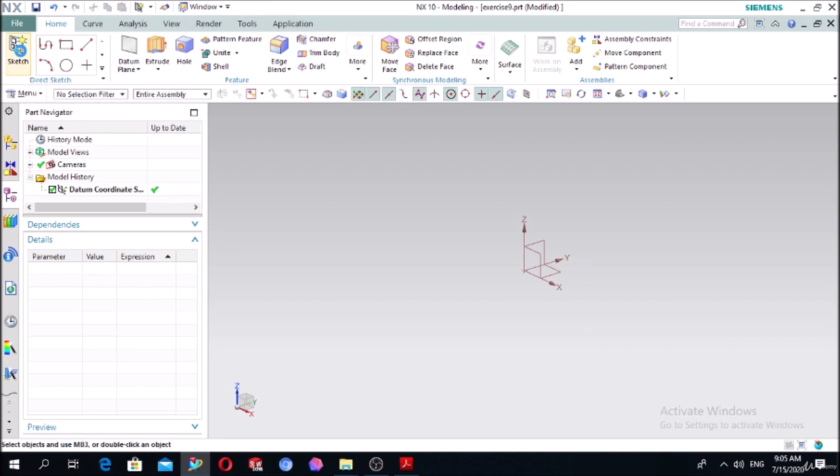Let's open the NX, press the sketch, select the plane and press OK. So let's firstly draw the circle on the center of the axis and put the dimension as 50 millimeter, and draw one more circle. It will be a reference circle with the diameter of 70 millimeter.

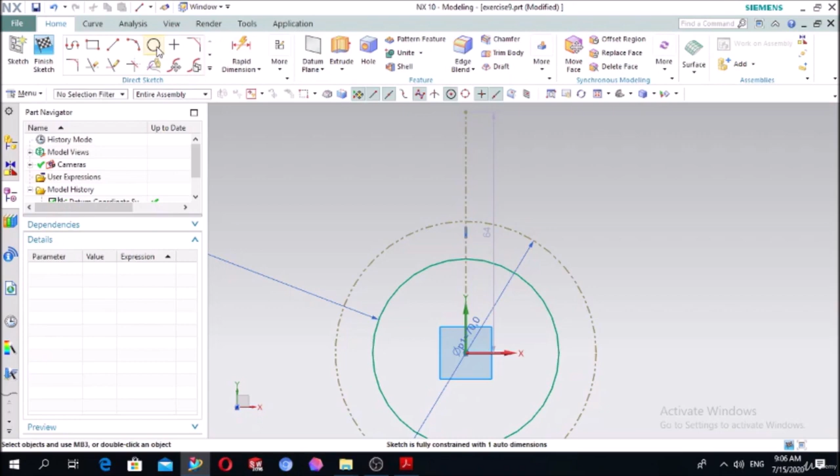So convert this second circle into a reference circle, so it is converted to the reference circle, and draw one line here, a vertical line. It will also be a reference line, and draw two circles. One, okay, and the diameter of the circle is 20 millimeter.

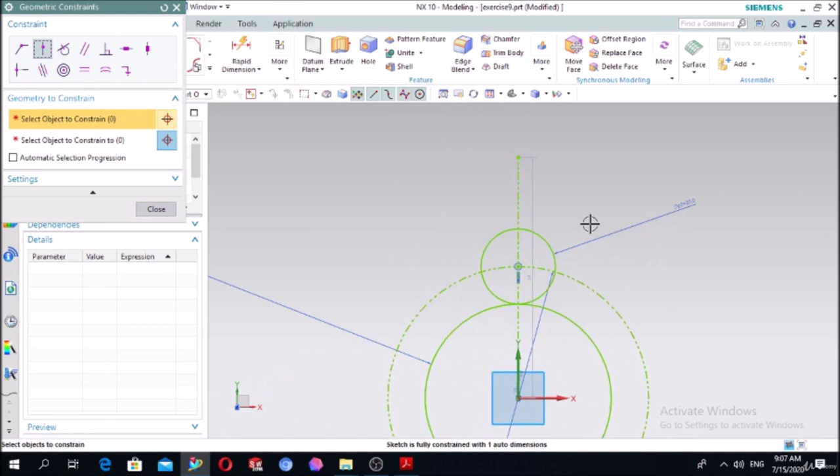Using the geometric constraint and point on the curve function, select the center and this vertical line, the same center of the circle and this circle, and draw a line here, this one and this line. The same here.

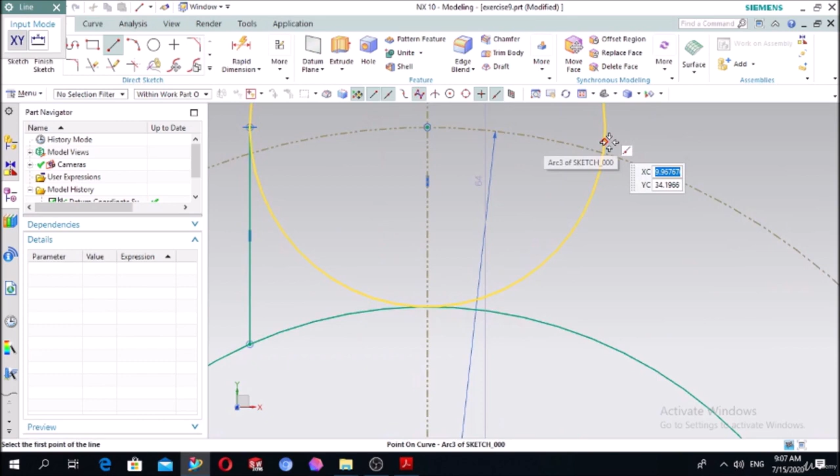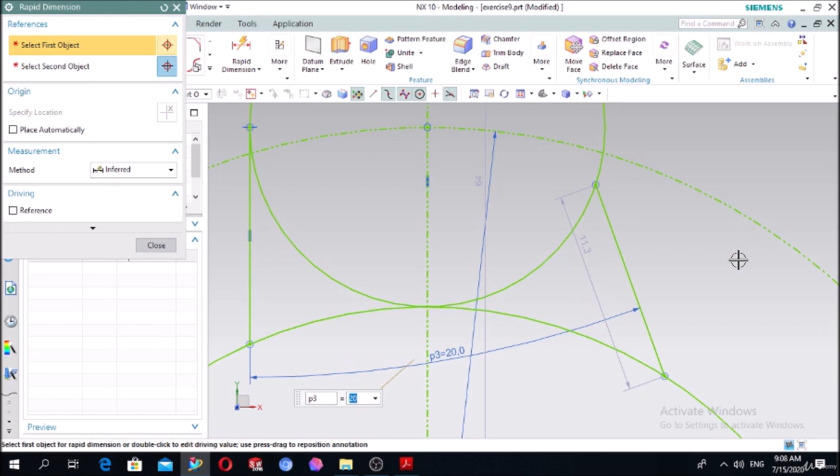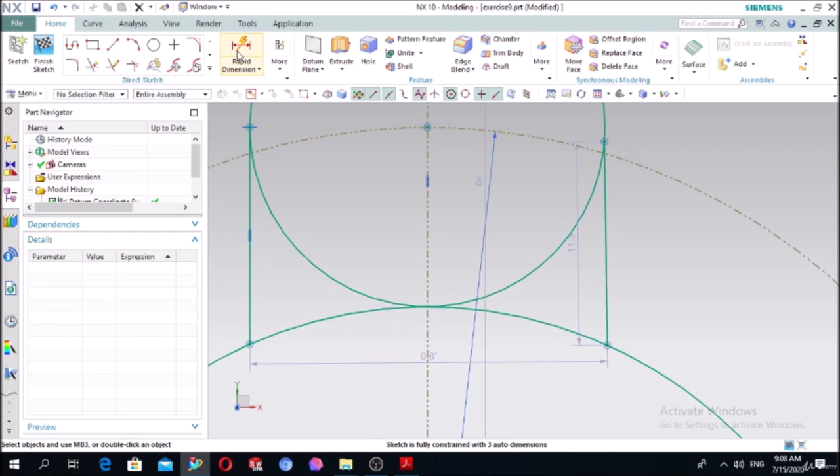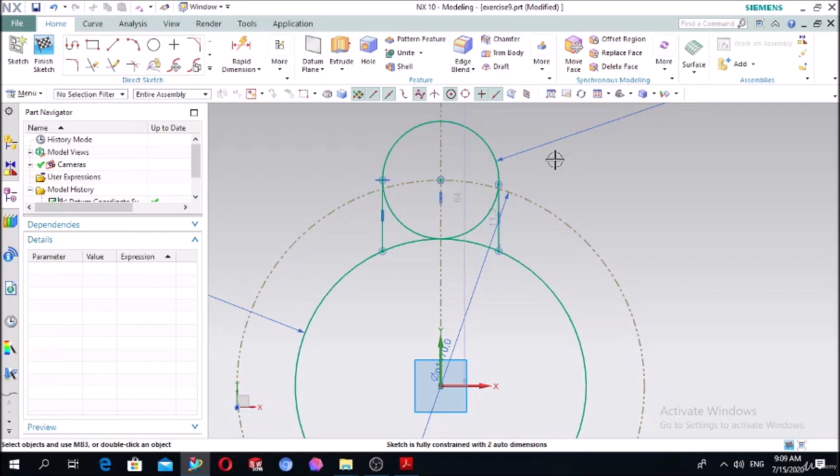And make the distance of these lines 20 millimeter. And make this line and this circle tangent. There is something wrong. Let's delete this one. The distance between this line and this line, okay. It's 20. Make it 20.

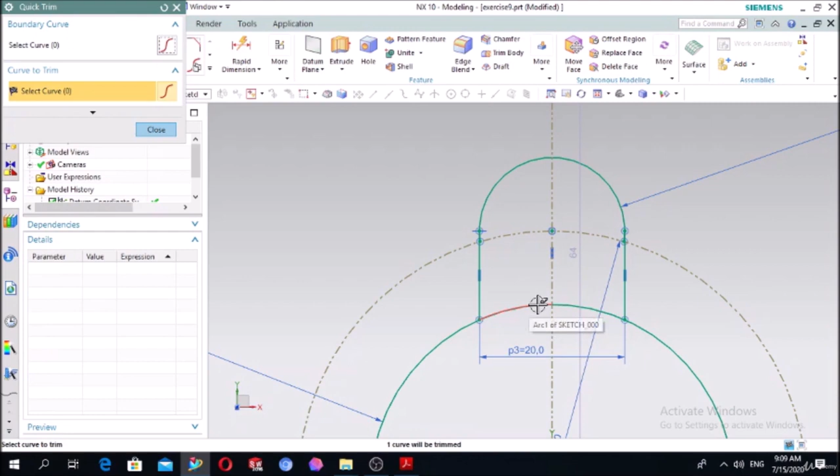And make a quick trim. This one, and these ones, and draw an additional small circle here, with the diameter of 10 millimeter.

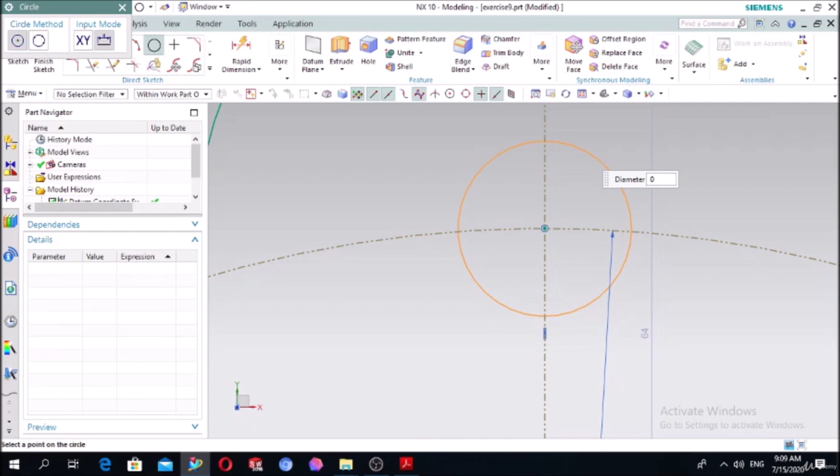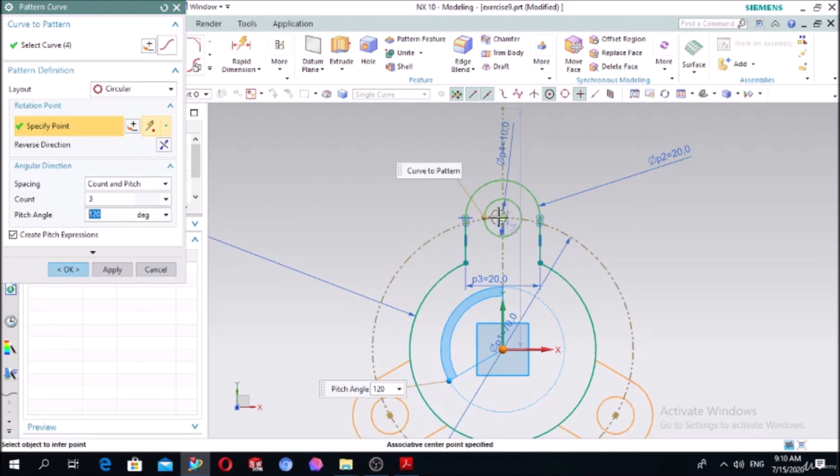Then using the pattern function, make a pattern of this curve, single curve, this one, this and this, in a circular layout. The center is this one, and the pitch is 120. Press OK and trim these unnecessary parts. Press close. Now we can make the extrusion using the extrude function.

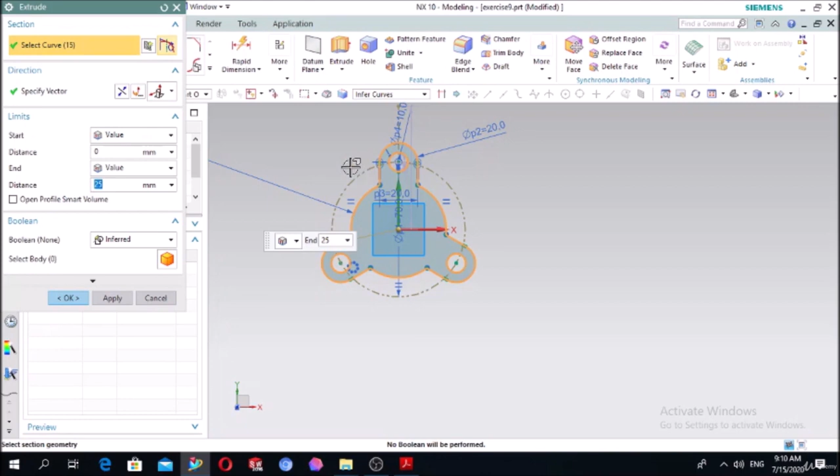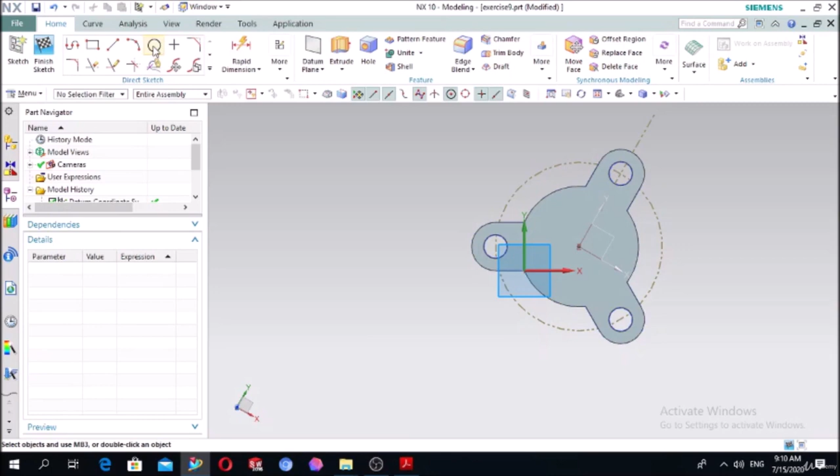Extrude is around 25 millimeter. Press OK. So the base is created. Now draw the next elements of the project. Select the sketch, select this face, press OK. Draw the circle in the middle with the diameter of 40 millimeter.

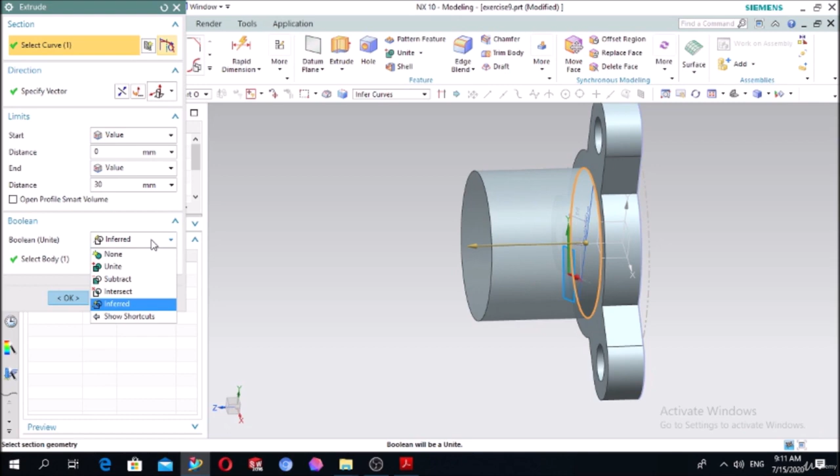And extrude it to a length of 30 millimeter. Here write 30 millimeter, and using the Boolean logic we can unite with the base. Press OK. Next is to draw on this face. Press OK. Draw the circle with the diameter of 30 millimeter.

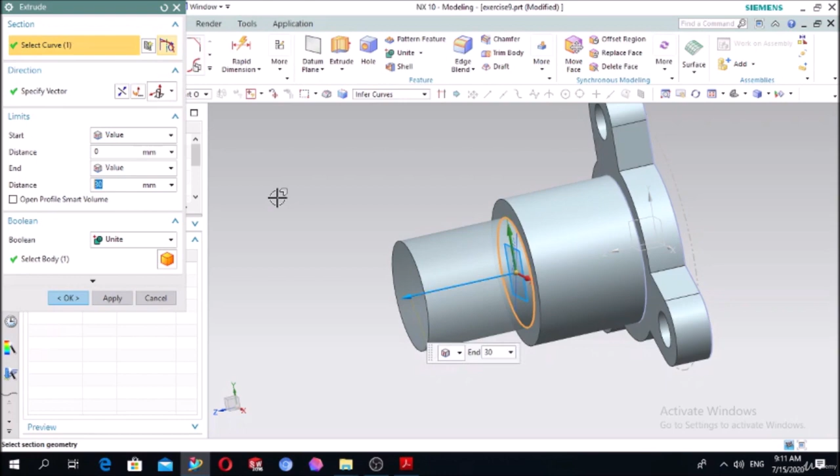Press OK. And using the extrude function, we will make the subtract, change the direction and the value to until selected, this face. It's not unite, in this case it will be subtract, so press OK.

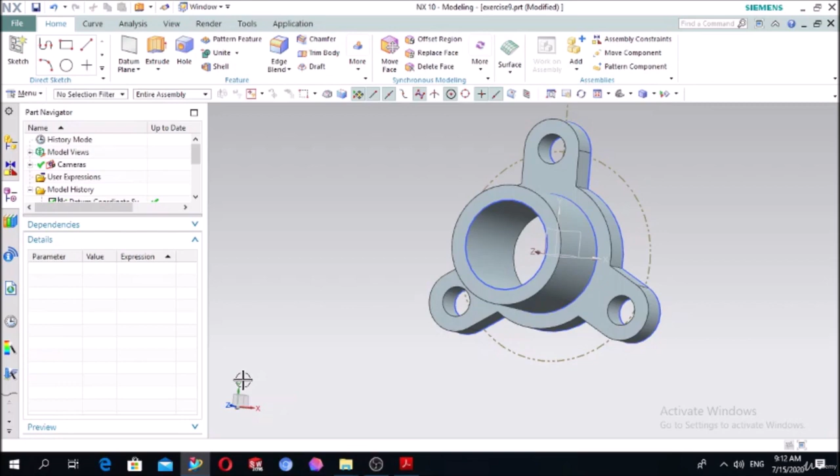Last step is to make the hole here, and it is at 120 degrees, so in this case we will need an additional reference datum plane. In order to make the reference datum plane, firstly make a sketch, select this face and press OK. So draw the line here and draw a line here, make the angle between this and this line.

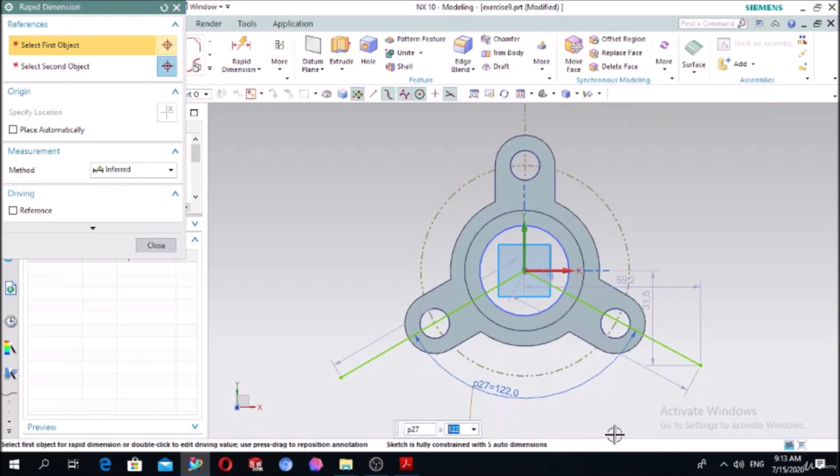Let's first delete this one and draw the line, and make the angle between this line and this line 120. No, just delete this one. Make the angle between this line 120, and convert these lines to reference, this line and this line.

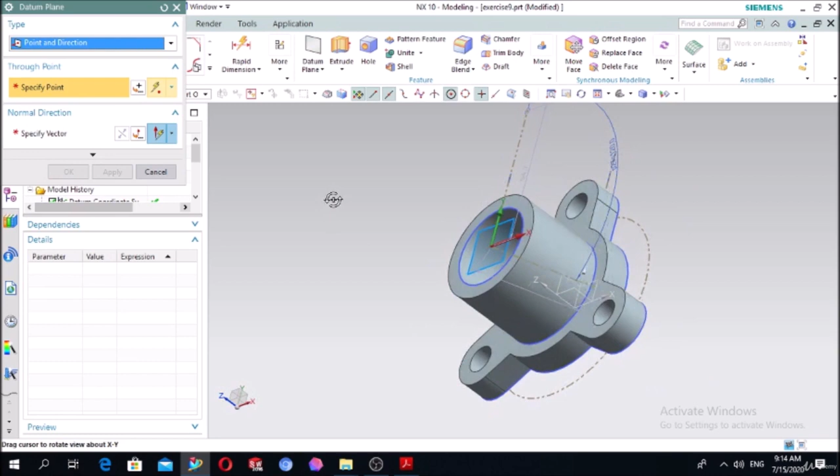And draw the datum plane here. Select the datum plane, select point and direction, select this point and press OK. So we made one additional datum plane here, and we will draw the circle on this datum plane.

Sketch, select, press OK. So draw the circle. The diameter is 5 millimeter. Distance between the center of the circle and this point is 15 millimeter.

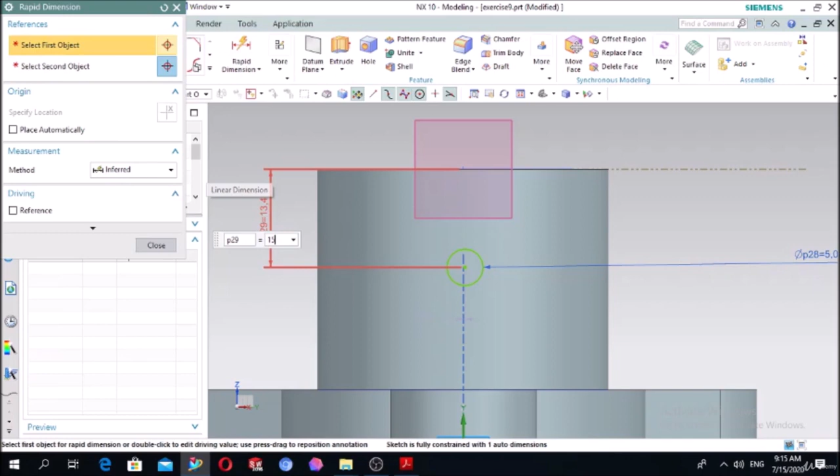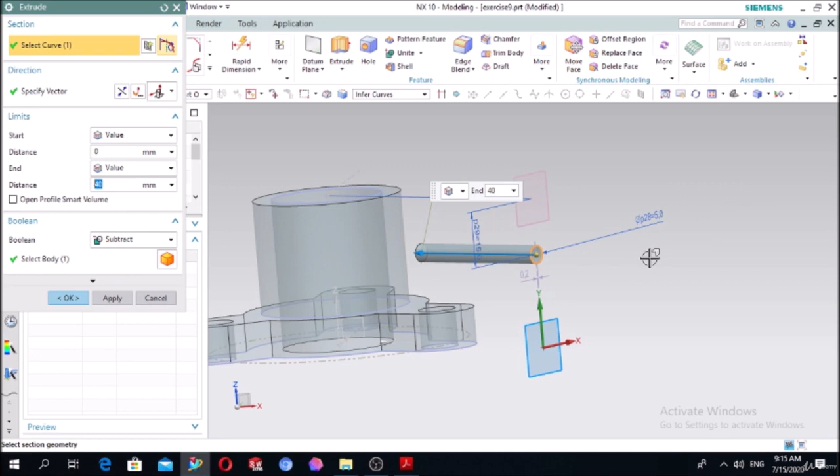The circle is created. Now we can extrude it, reverse direction, and make it subtract. Okay, the hole is obtained in the required position.

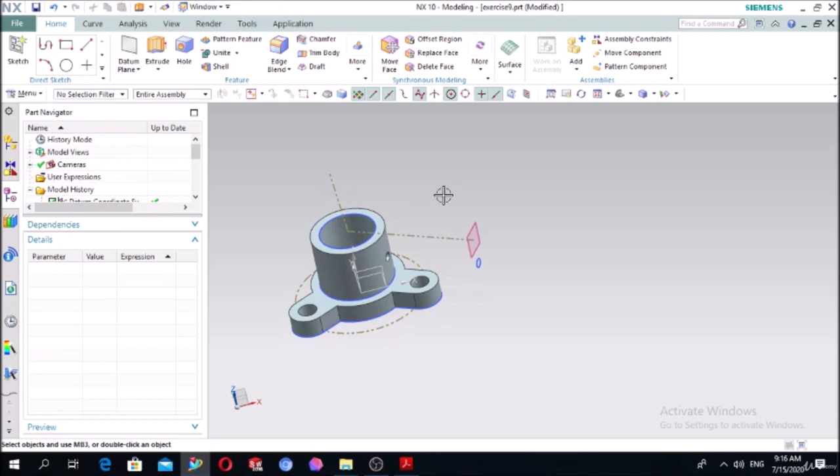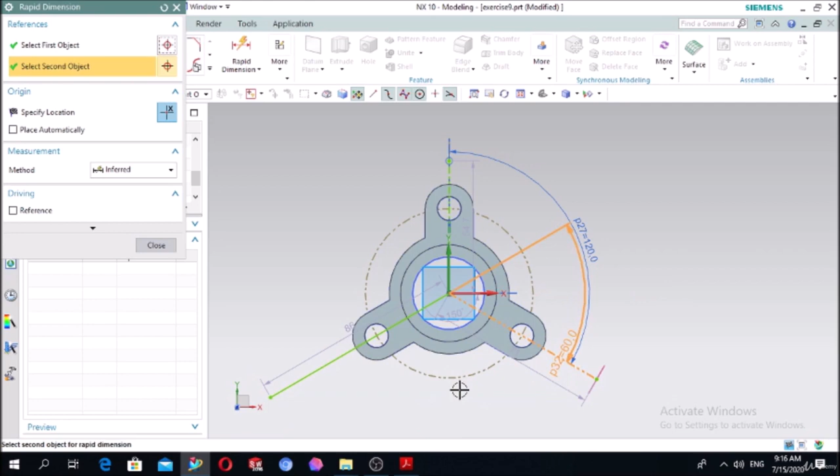So the same, we can make that on the plane here. Let's select this sketch and draw one more line here. Define the angle between this and this, 120, convert it to reference and finish. Select the datum plane, this point, and press OK.

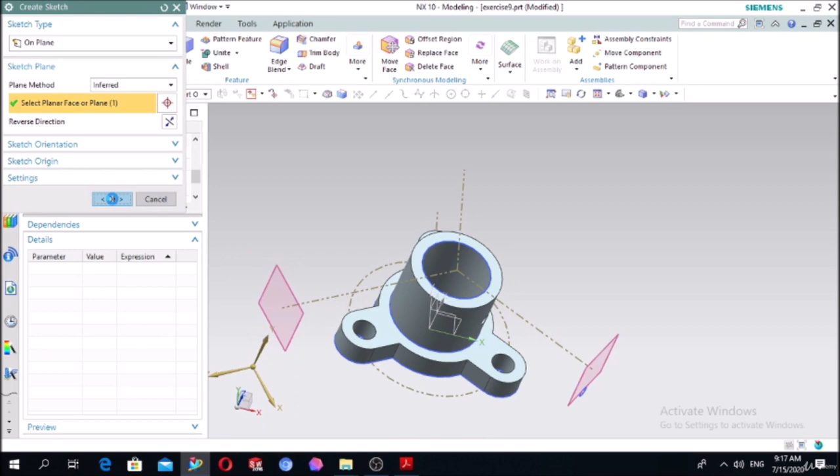Sketch, select this datum plane, sketch, this datum plane, OK. Five millimeter, press enter. And the distance between this center and this point is 5 millimeter.

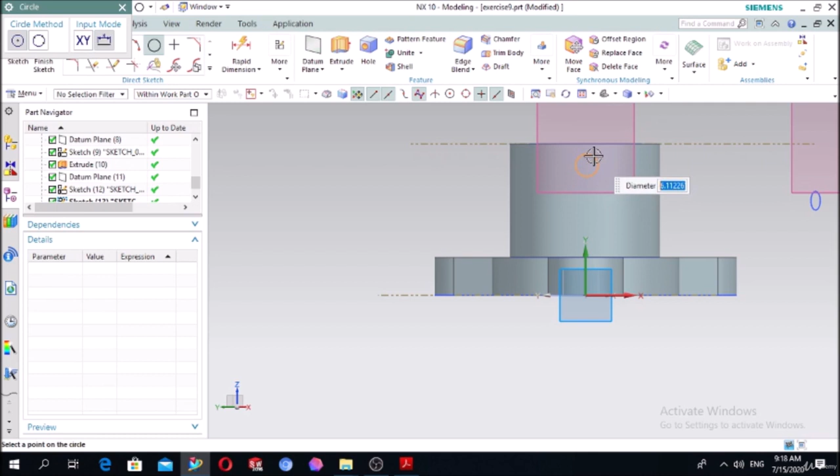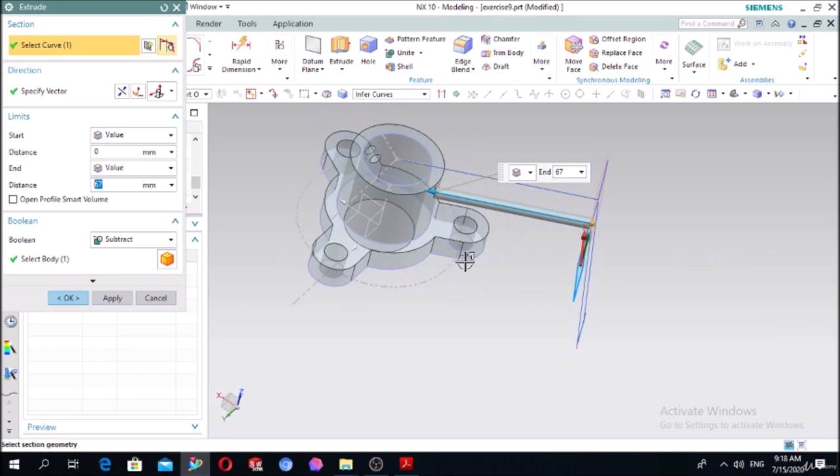And distance, and the distance from this point to this point is 15 millimeter. Extrude, reverse direction, subtract, and OK. See, 2 holes are obtained. This is the first exercise for today's lesson.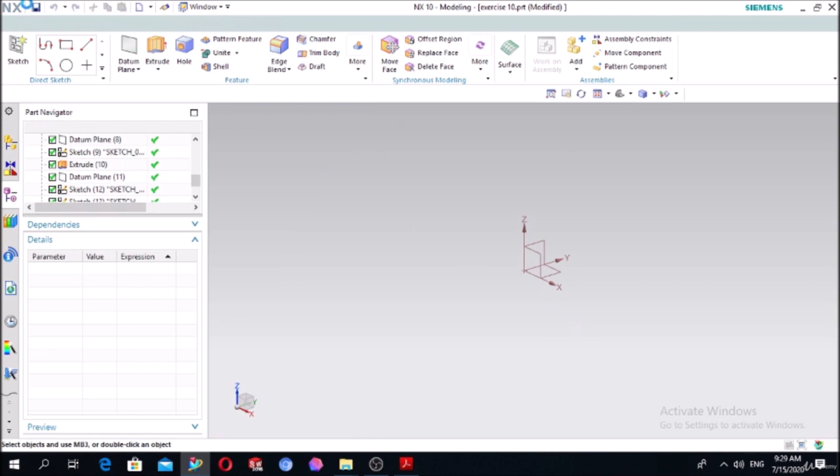Now we will see the second one, this exercise. Okay, let's continue with the second project. Open new file. Call it exercise 10. Press OK. Select the sketch, define the plane and press OK. The second exercise, this one, let's start to draw this project. Okay.

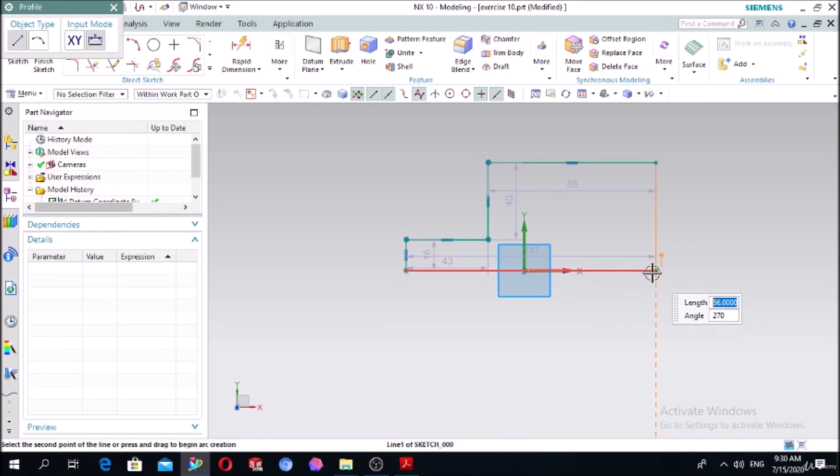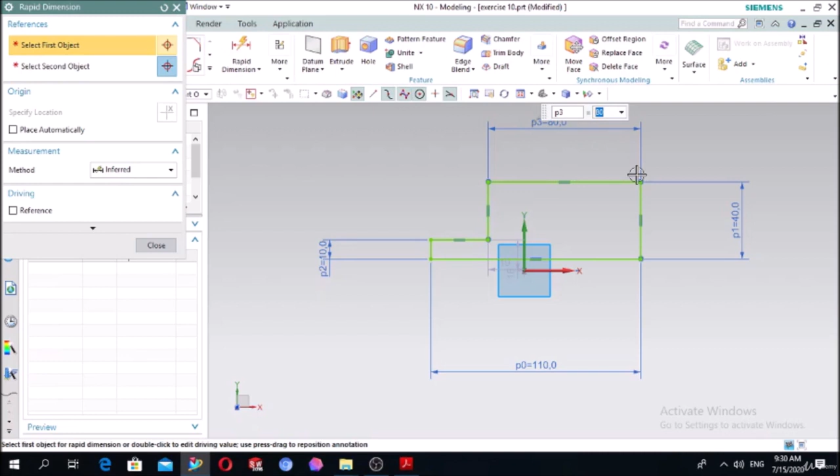Select the profile. Draw the line here, in this kind of shape. Define the dimensions. The height is 40 millimeter. Okay, first we can make this distance 10 and the height is 40 millimeter, and this distance is 80. And I think this distance is already defined.

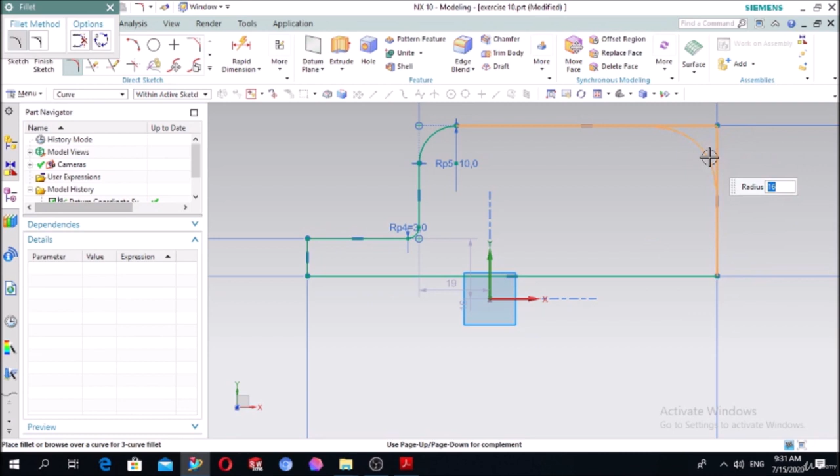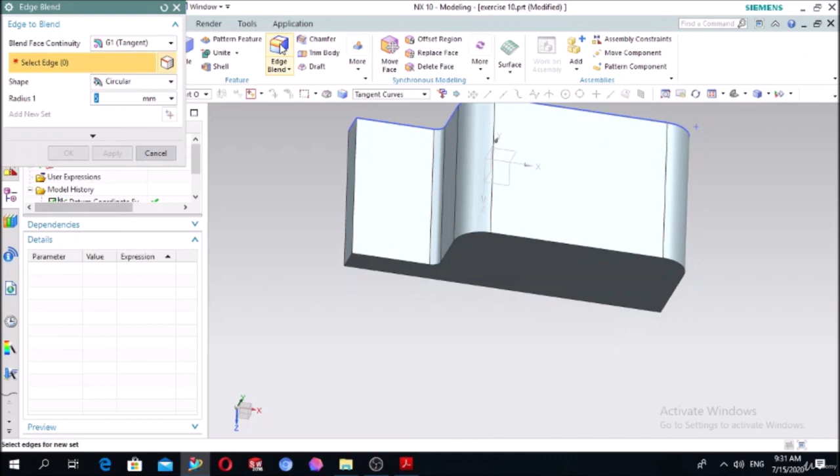Make the fillet on this part. The radius is 3 millimeter, and the same here, 10 millimeter, and here also 10 millimeter. This sketch is ready, we can make extruded. It is 50 millimeter. Press OK. We can make the edge blend. 10mm this one, and this one also. Press OK.

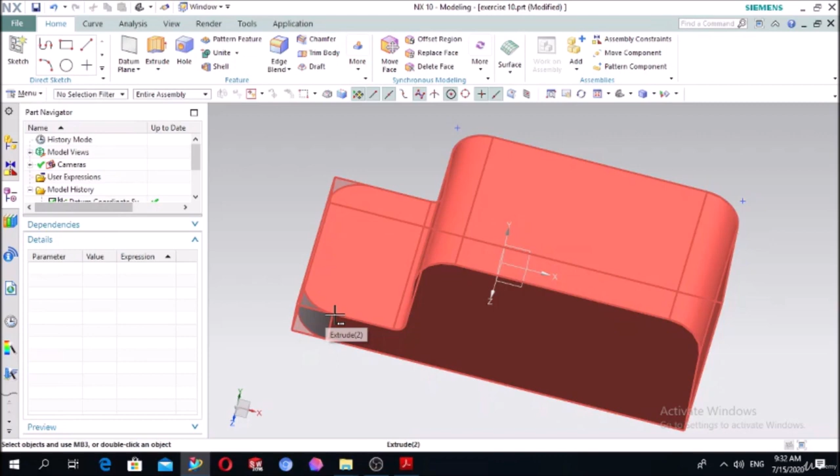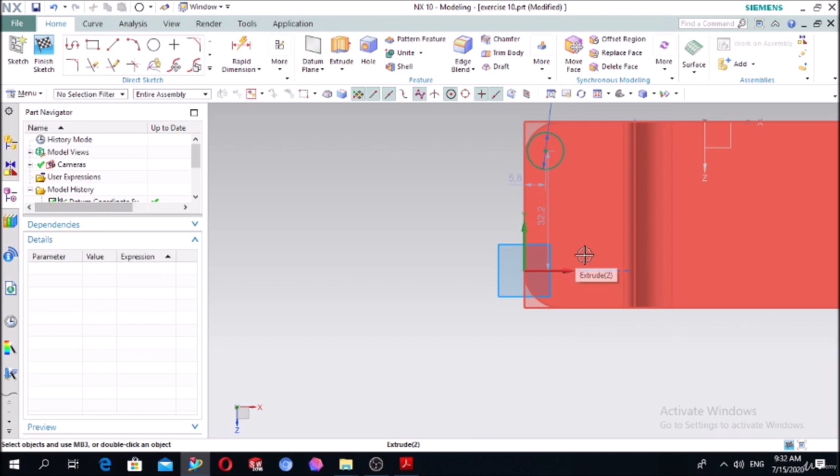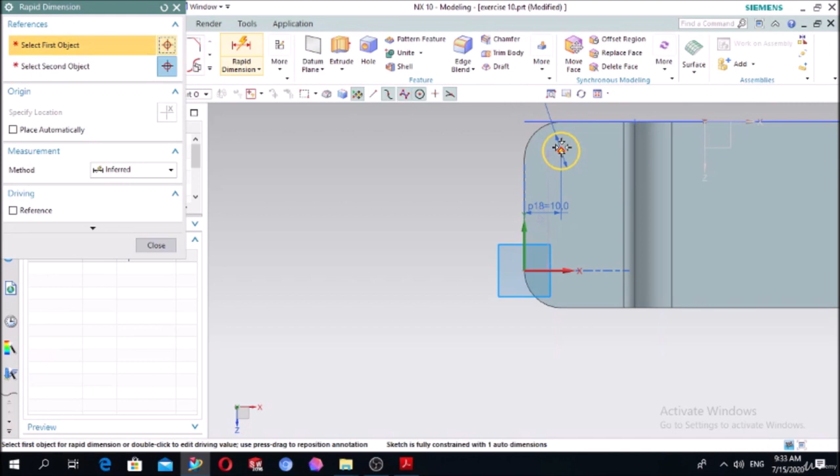Now we can make the holes. Press sketch, select this face, press OK. Draw the hole the same way. Okay. 10mm. The distance between this line and this line is 10. And this distance is also 10mm.

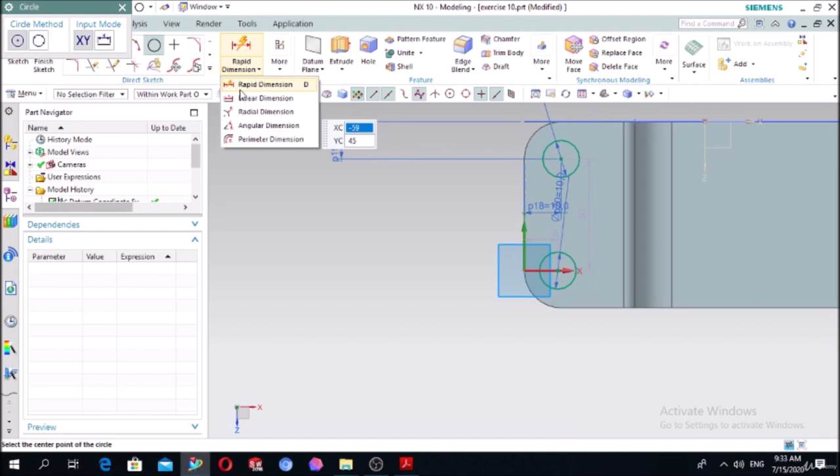We can make the mirror of this hole around the, oh, there is no center line, so we can additionally draw a line here, circle here, 10mm. 10mm and 10mm. So the distance should be 30mm. Yes, it's correct. You can delete and draw one more additional line here, circle here, with the diameter of 6.

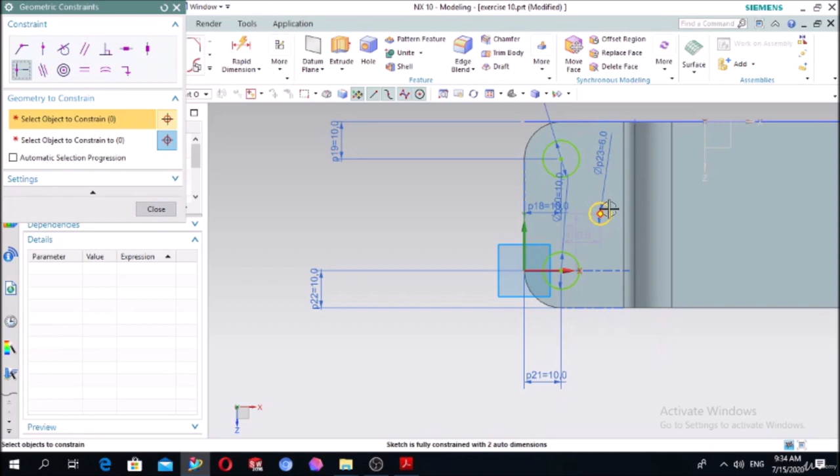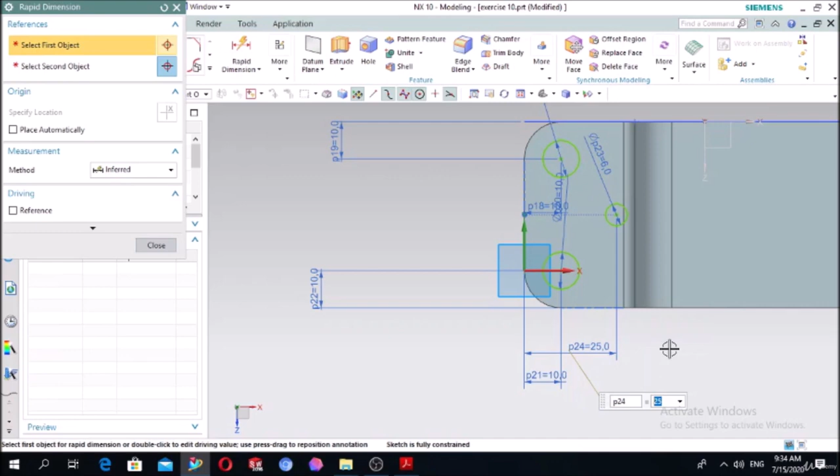Using geometric constraint, midpoint, this line, circle on this line, so it is in the midpoint, and the distance between this and this is 25mm. Okay, extrude it, reverse direction, subtract. Okay.

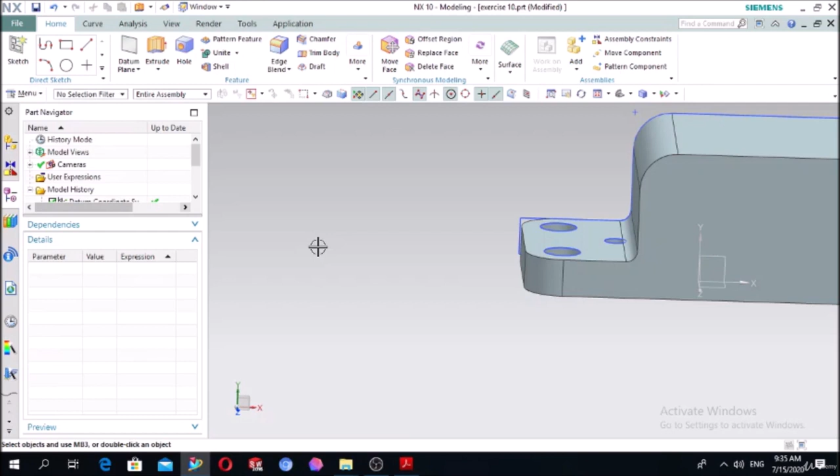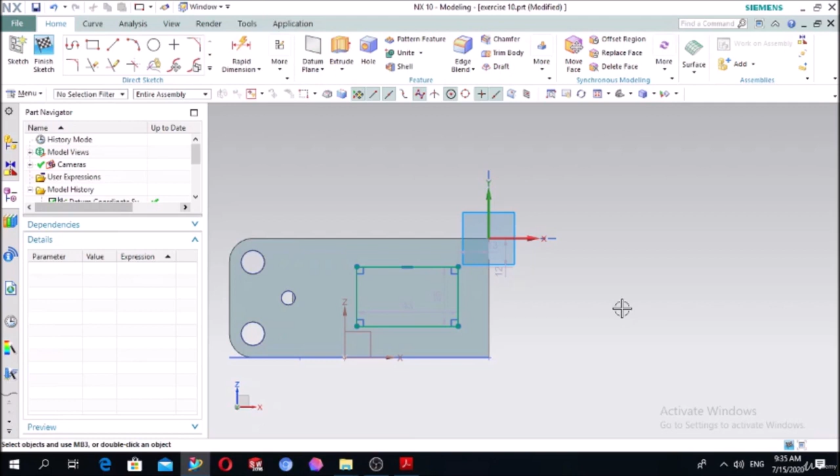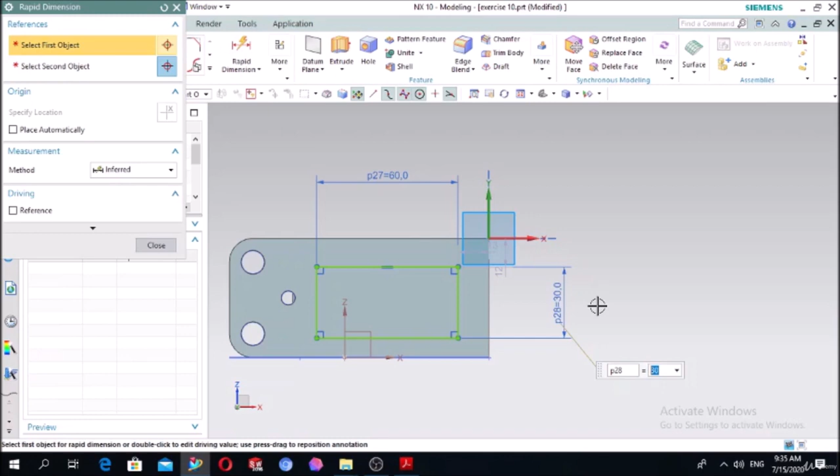Now select the sketch, select this face, press OK. Draw rectangle. The dimensions of the rectangle defined: this is 60, and this is 30 millimeter. And this distance is 10 millimeter.

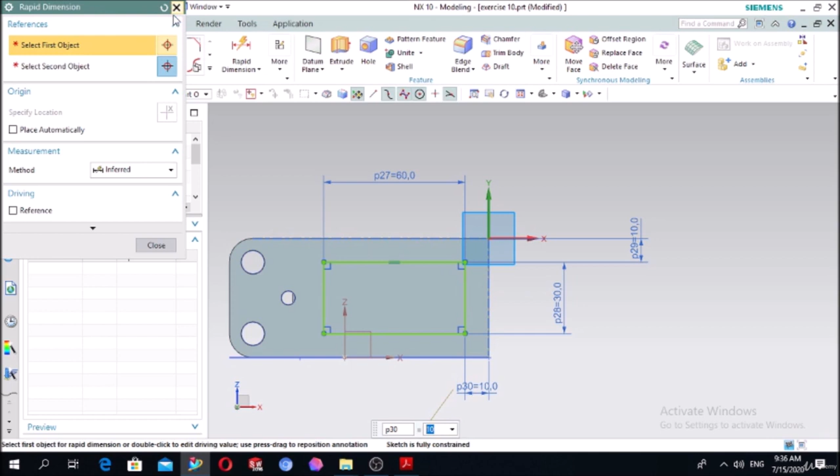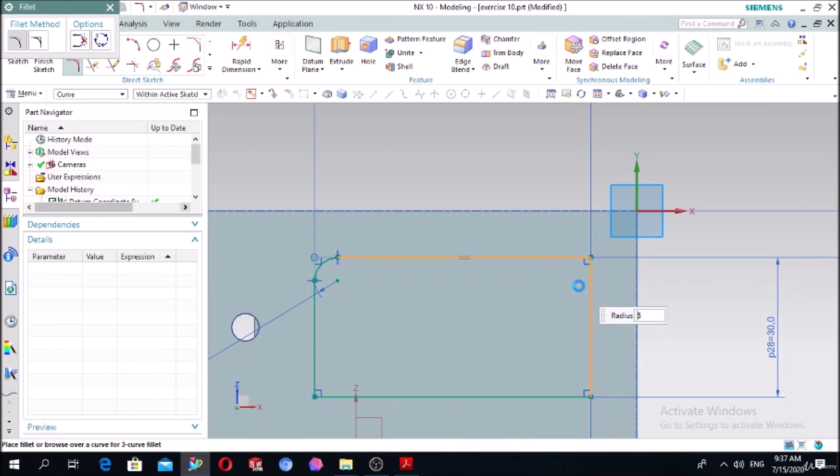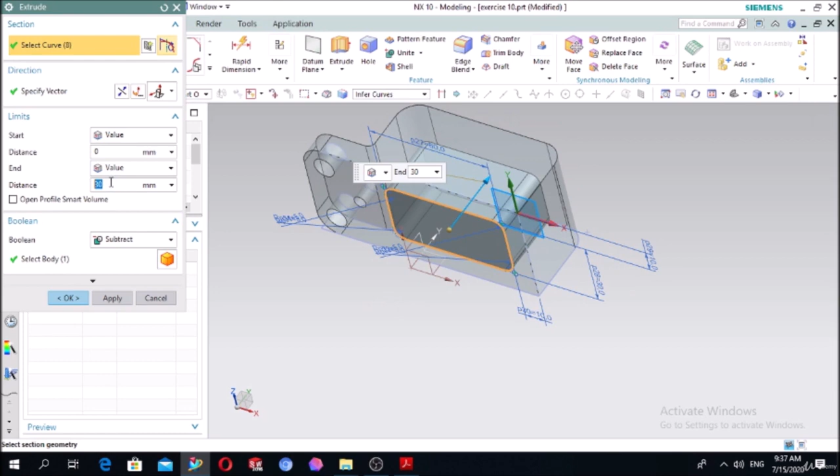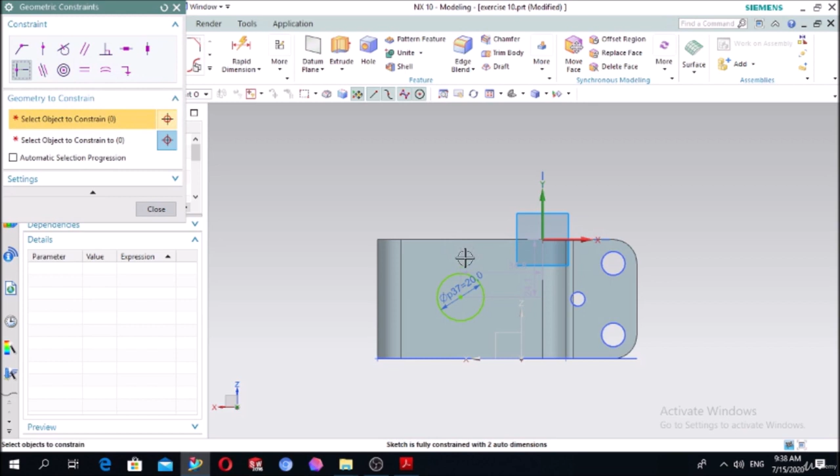Select the sketch, select this face, press OK. Draw the circle here. The diameter is 20. Using the geometric constraint, make it midpoint. This circle at the midpoint of this line, and this circle at the midpoint of this line. Extrude it, reverse direction, distance is 5 millimeter. Subtract, press OK.

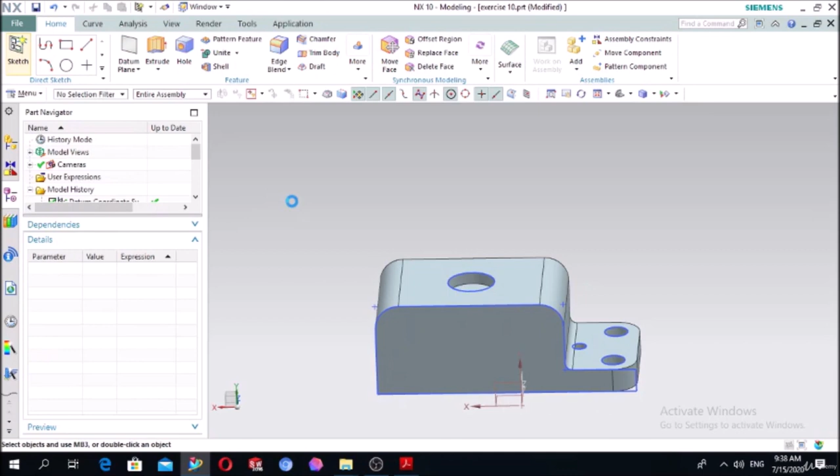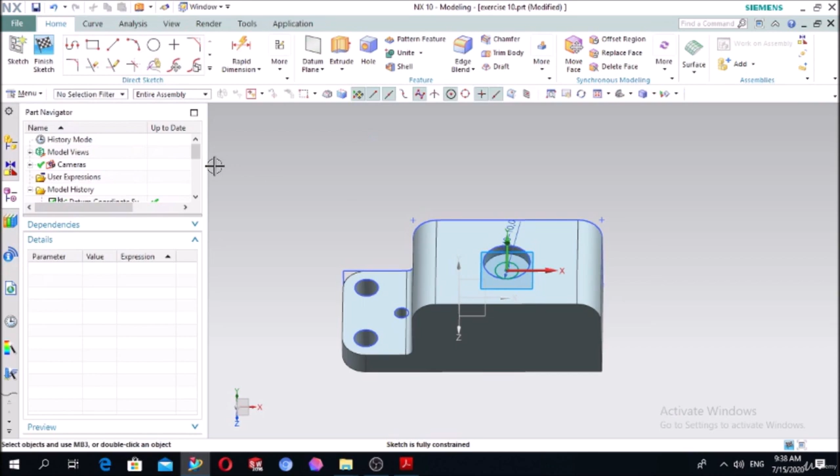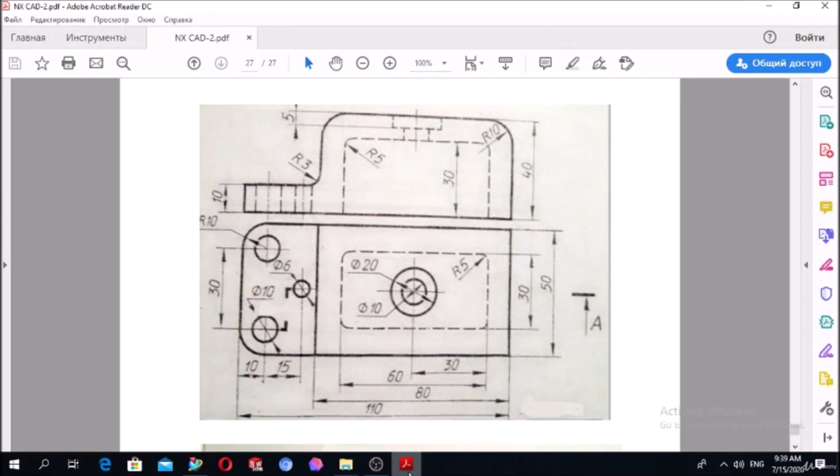The same, sketch this face, press OK. Draw the circle. The diameter is 10, press OK. Extrude it. Reverse direction, value is until selected of this face. Press OK. So we obtained our second project, this one, and let's continue with the third, last of today's projects.

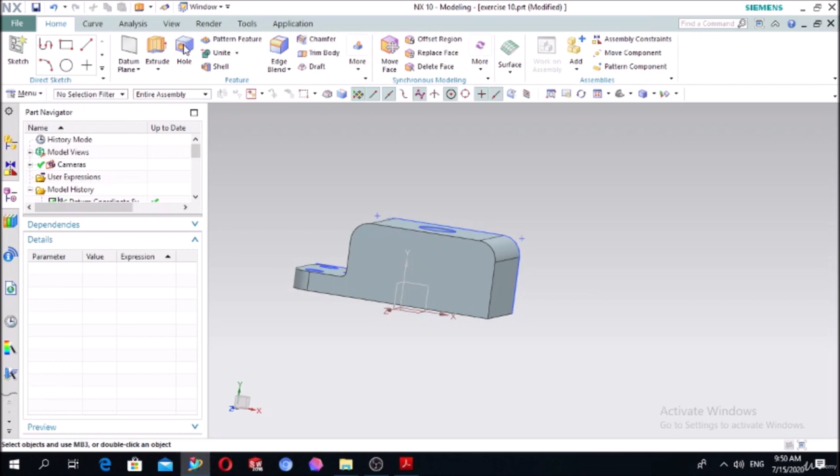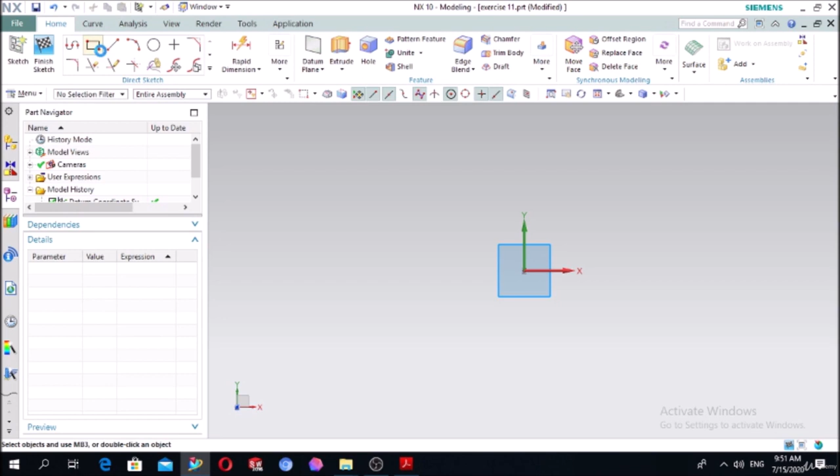Okay, let's continue with this project. Open the new file. Exercise 11. Press OK. Select the sketch. Select the plane and press OK. Draw the rectangle, for example by the center. Define the dimensions using the rapid dimension. The length is 120 and the height is 50 millimeter.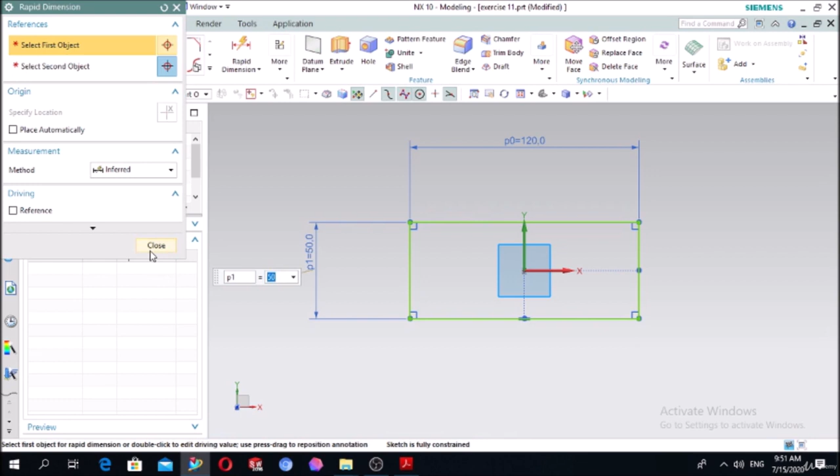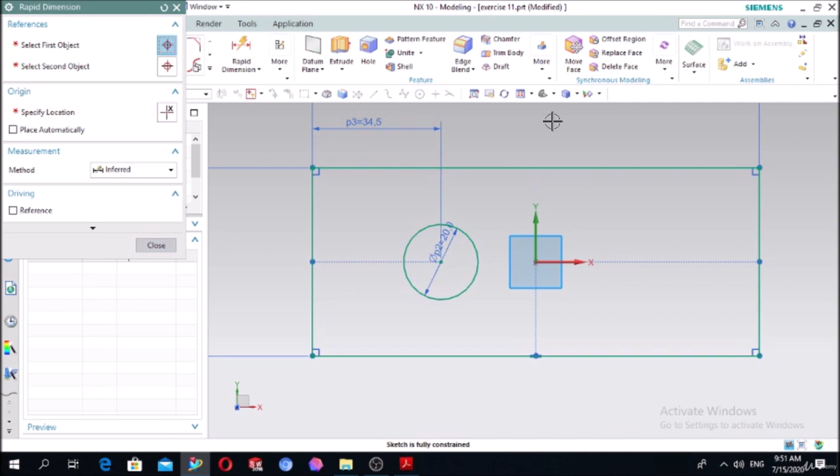Draw the circle with the diameter of 20 millimeter. Using the geometric constraint, midpoint, make this circle the midpoint of this line, and define the distance between this line and the center of the circle as 34.5 millimeter.

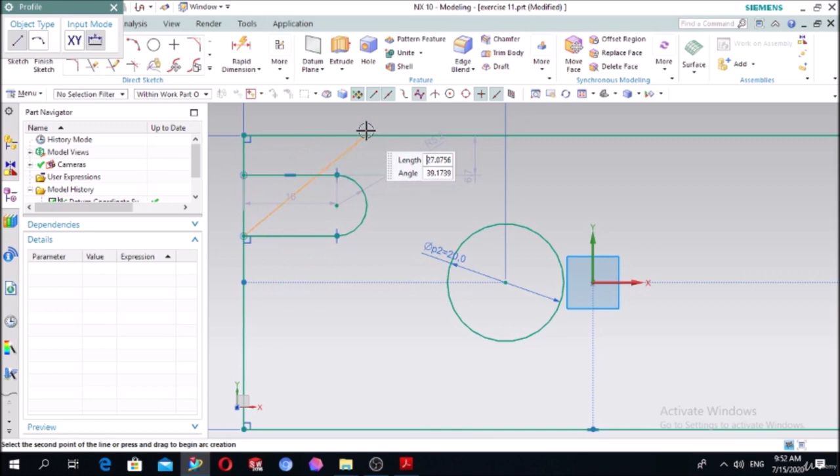Using the profile, draw the line here, convert to arc, draw the arc, and draw the line here. Define the length of the distance as 15 and the diameter, this distance is 10 millimeter.

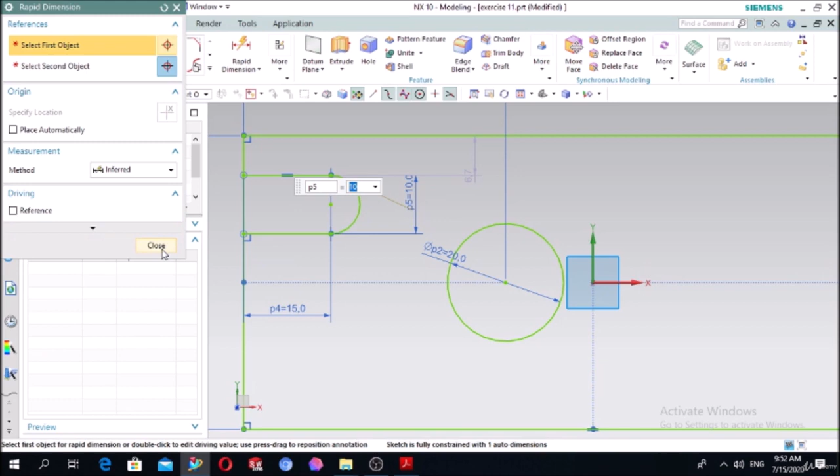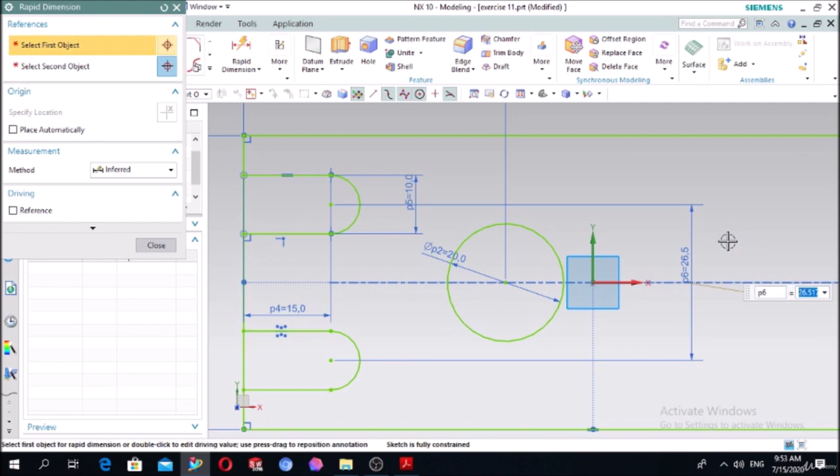Okay, make it mirror around this center line. Okay, define the distance between this and this as 30 millimeter. Make the quick trim of these parts so it is finished. Close it, extrude it a distance of 10 millimeter. Press OK.

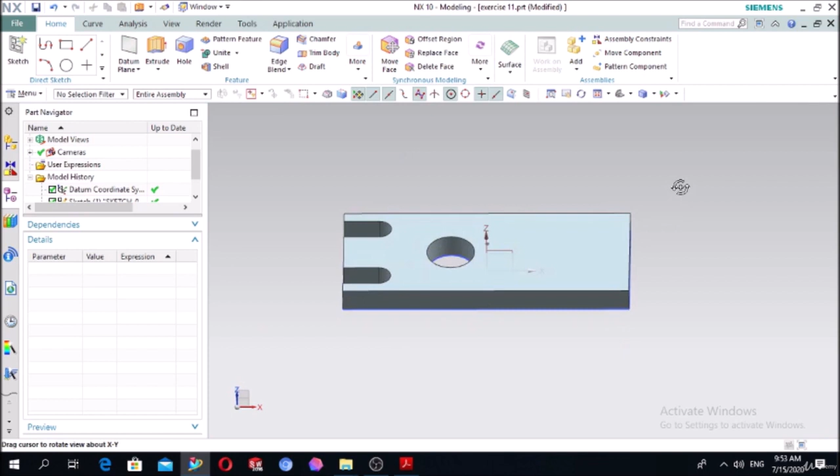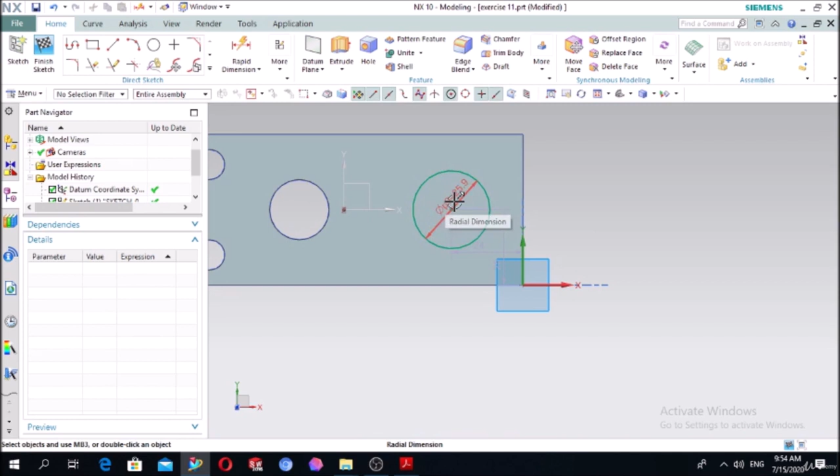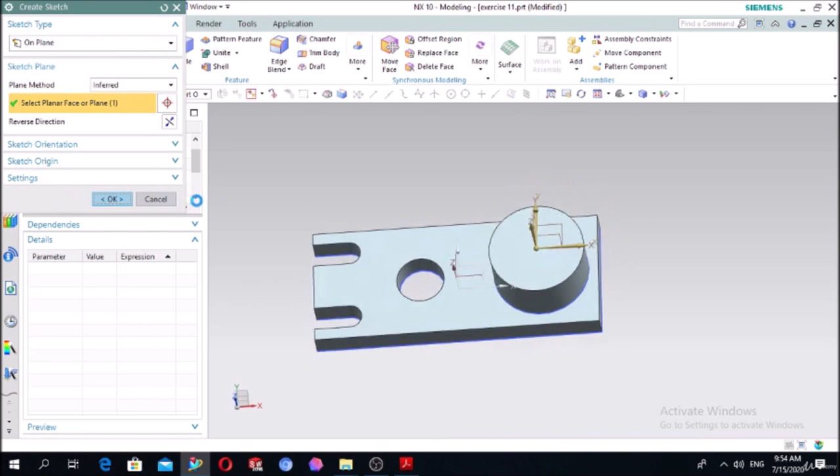Select the sketch, select this face, press OK. Draw the circle here in the midpoint. The diameter is 40 millimeter. And extrude it a distance of 20 millimeter. On the boolean, make it unite with the base, press OK. OK, sketch this face, press OK. Draw the circle one more with the diameter of 30 millimeter, press OK.

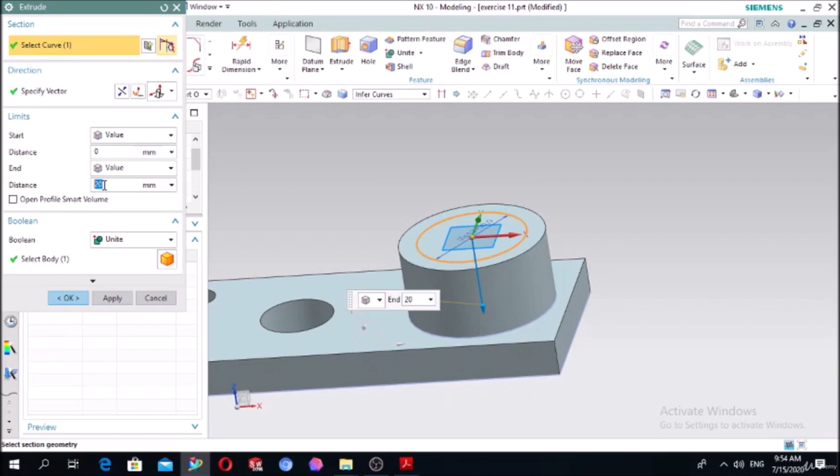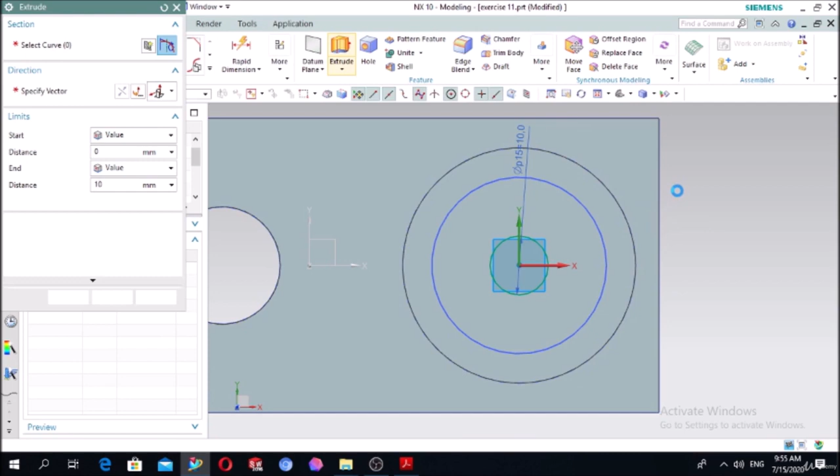Okay, select extrude function. In this case, reverse direction. The distance is 10 millimeter and the boolean is subtract. Press OK. Select the sketch again. Select this face. Press OK. Draw again the circle with the diameter, in this case, 10 millimeter. Extrude it in reverse direction. In this case, we can use end value until the selected of this face, you see, and subtract. OK.

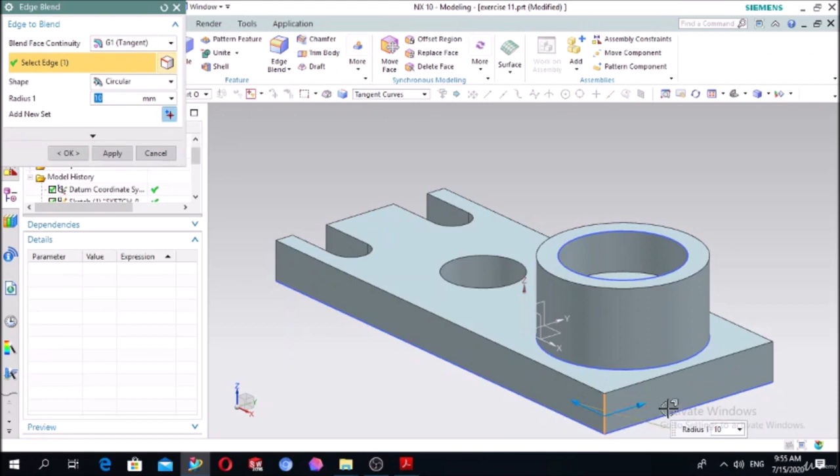So the third, last project is almost finished. Only here we can make the edge blend. This face, the radius is 5 millimeter, and press OK. The project is finished and today's lesson is also finished.